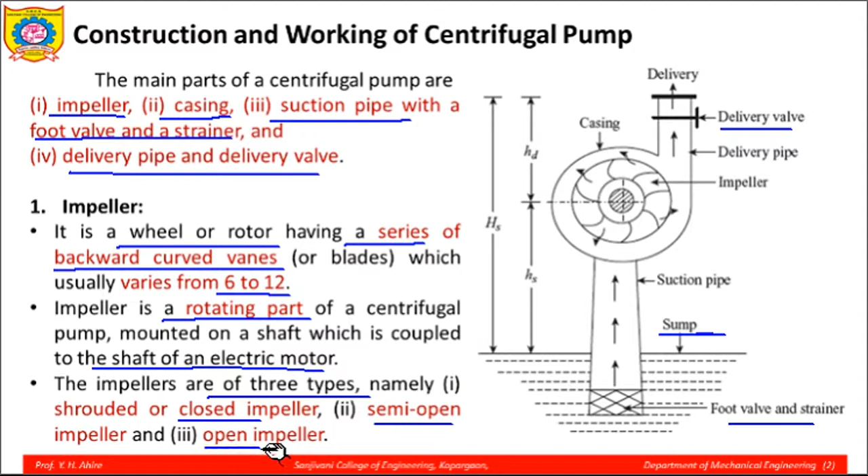Okay, the back plate is called as base plate, and the front plate, this one, is called as a crown plate. So these metal plates, also known as shrouds, are known as crown plate and base plate. Okay, the closed impeller is more efficient and it provides better guidance to the liquid.

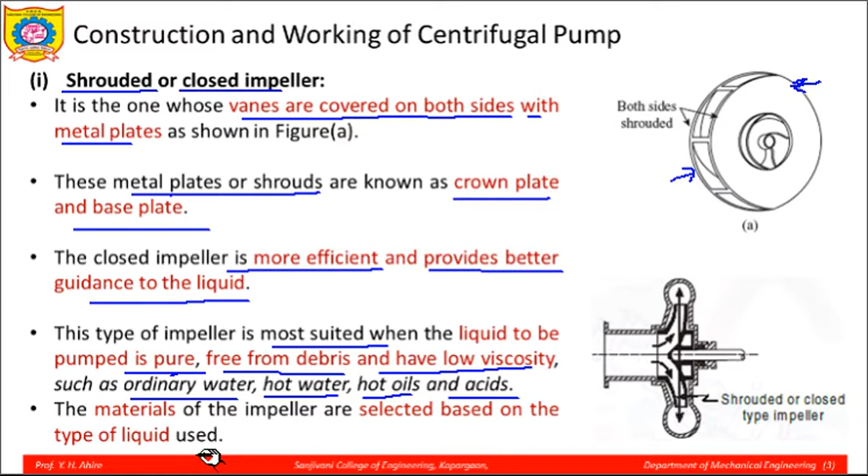This type of impeller is most suited when the liquid to be pumped is pure and it is free from debris and has low viscosity. Okay, examples of such liquids are ordinary water, hot oils, and the acids, right? So these liquids should be pure and they should be free from the solid debris. Also the liquids should have low viscosity. Okay, the material of the impeller is selected based on the type of liquid used.

It can be used even if the liquid contains some debris such as sewage water, paper pulp and sugar molasses. Okay, these kinds of liquids containing some semi-solid debris can be pumped by means of a semi-open impeller.

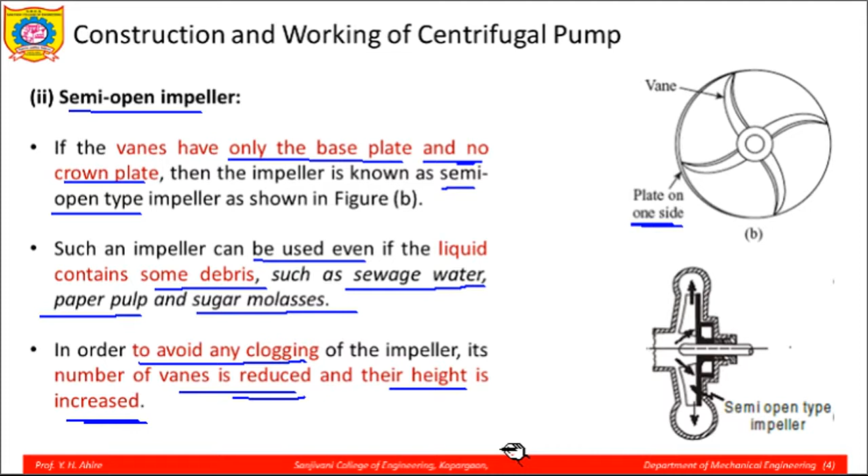Now, in order to avoid any clogging of this impeller, its number of vanes is reduced and their height is increased so as to prevent the clogging of the impeller because of debris. The number of vanes is less, but the height of the vanes is more.

The third type of impeller is open impeller. An open impeller is the one whose vanes have neither the crown plate nor the base plate. Okay, these vanes are open on both sides, right?

Examples are paper pulp, sewage water and the water containing sand, grit, pebbles and clay. Such kinds of liquids can be pumped by means of an open impeller. Generally, this impeller is made of forged steel as a material, as it has to perform a very rough duty.

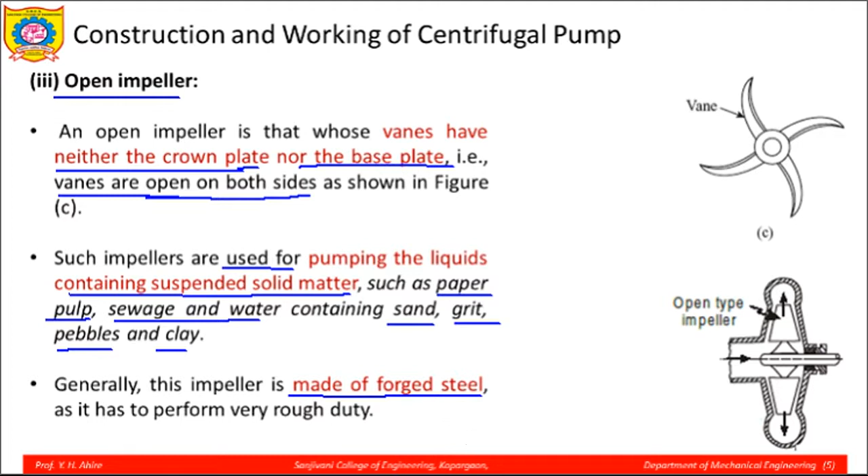Now, the second component of a centrifugal pump is a casing. Casing is an airtight chamber which surrounds the impeller. It is similar to the casing of a reaction turbine. An airtight chamber which surrounds the impeller of a centrifugal pump, and it is almost similar to the casing used in a reaction water turbine like a Francis turbine

or Kaplan turbine. The casing is designed in such a way that the kinetic energy of the water discharged at the outlet of the impeller is converted into pressure energy before the water leaves the casing and enters the delivery pipe. So the kinetic energy of the water leaving the impeller is converted to pressure energy as it flows through the casing before exiting the casing.

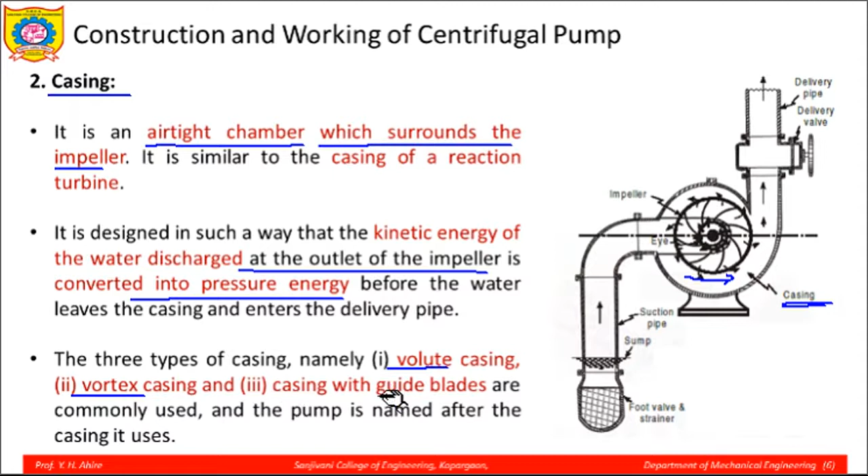Now there are three types of casing: volute casing, vortex casing and a casing with guide blades. So let us see one by one. Volute casing. The volute casing is of spiral shape, in which the area of flow increases gradually from the impeller outlet to the delivery pipe. The volute casing is of a spiral shape.

So here you can see this is a spiral shape of the casing, but the cross section of the casing, that area increases from the impeller outlet up to the entry of the delivery pipe. So there is a continuous increase in cross sectional area of the casing. A gradual increase in the cross sectional area of the casing, and the overall shape is like a spiral.

The increase in area of flow decreases the velocity of the flow with corresponding increase in the pressure of the water flowing through the casing. Cross-sectional area increase results in drop in the velocity and increase in the pressure of the water. Single stage pumps mostly have volute type casing.

The volute casing has higher eddy losses, which results in lower overall efficiency of the pump. There will be a lot of eddy formation as the liquid flows in the casing. So that results in a loss of energy, so the efficiency reduces. The pumps which use such a type of casing are called volute pumps.

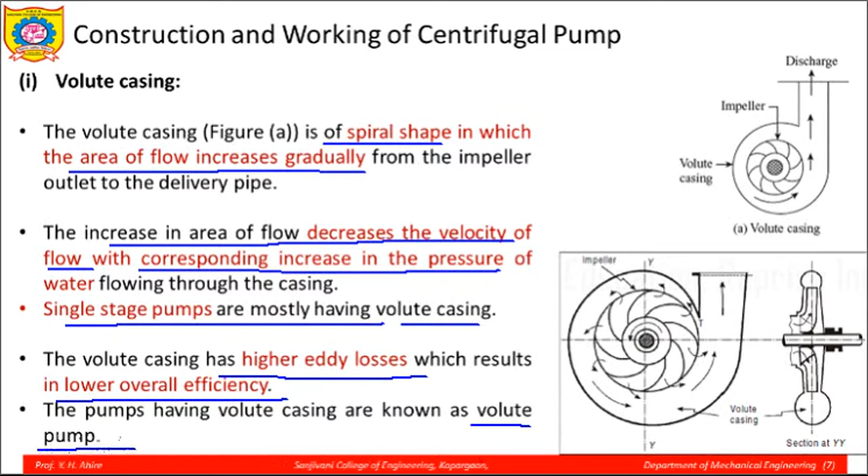The vortex chamber reduces the eddy formation to a considerable extent. Thus, the efficiency of these pumps will be more than that of the earlier volute casing pumps, as it reduces the formation of eddies. The pumps which use this type are called volute pumps with a vortex chamber.

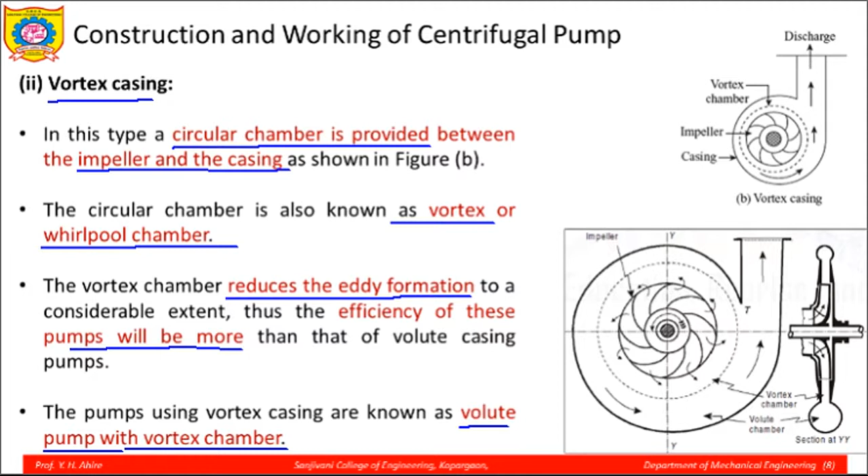Then we have the third type, casing with guide blades. The impeller here is surrounded by a series of fixed guide blades which are mounted on a diffuser ring. The impeller is surrounded by a series of fixed guide blades, and these guide blades are mounted on the diffuser ring. And then there is the external casing.

The guide vane passages are of increasing area, so that reduces the velocity and increases the pressure of the flow, and the water from the impeller enters the guide blades without any shock. That is how the guide blades are designed. The water from the guide vanes then passes through the casing, which is mostly concentric in shape with the impeller.

The pumps having guide vanes are called diffuser pumps, or these are also known as turbine pumps, as it resembles a reversed reaction water turbine. Construction wise it is similar to that. These pumps may be of vertical or horizontal shaft type. The vertical shaft type occupies less space and is suitable in deep well installations.

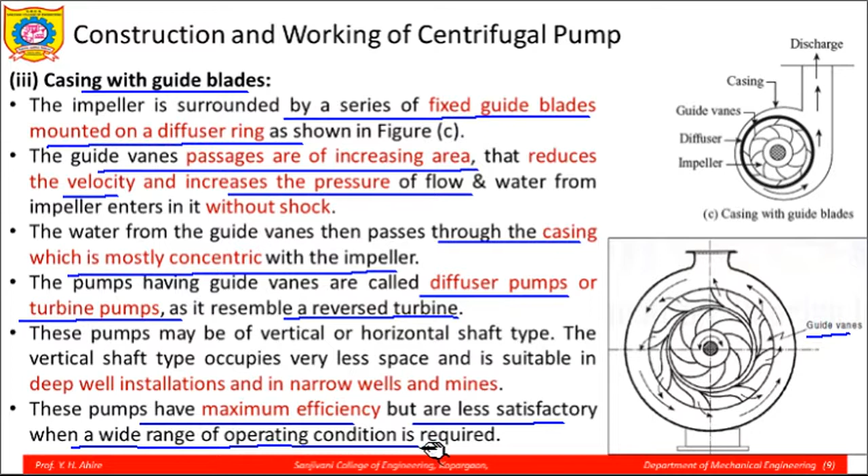These pumps have maximum efficiency, but these are less satisfactory when a wide range of operating conditions is required. So they are efficient at one particular operating condition.

Then we have the third component, that is the suction pipe with a foot valve and a strainer. Now, the suction pipe is a pipe whose upper end is connected to the inlet of the pump, that is the center of the impeller, which is also known as the eye of the impeller, and the lower end of the suction pipe dips into the liquid in a sump.

The lower end of the suction pipe is fitted with a foot valve and a strainer. The foot valve is a non-return one-way valve which opens in the upward direction, and it prevents the flow in a downward direction. Okay, one-way valve in upward direction. The liquid first enters the strainer, which removes the debris, if at all, from the liquid, and then the liquid flows into the foot valve, and then it will flow through the suction pipe up to the entrance of the impeller.

The delivery pipe and the delivery valve is the last component. It is the pipe whose lower end is connected to the outlet of the pump, and its upper end delivers liquid to the required height to the overhead tank. Now, just near the outlet of the pump on the delivery pipe, a regulating valve is fitted, which controls the flow of liquid from the pump into the delivery pipe.

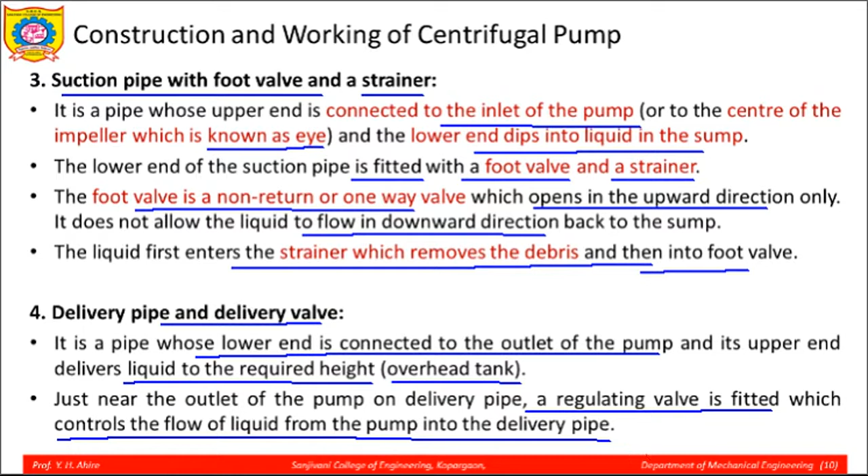The stepwise working of a centrifugal pump is explained below. The first step in the working operation of a centrifugal pump is priming. Now, during the priming operation, the delivery valve is kept closed. Priming is the operation in which the suction pipe, the casing of the pump, and some portion of the delivery pipe up to the delivery valve are completely filled with the liquid which is to be pumped, so that no air pockets are left. Okay. So, this portion of the suction pipe, casing, and some portion of the delivery pipe is filled up with the liquid so as to remove any air pockets before starting the pump.

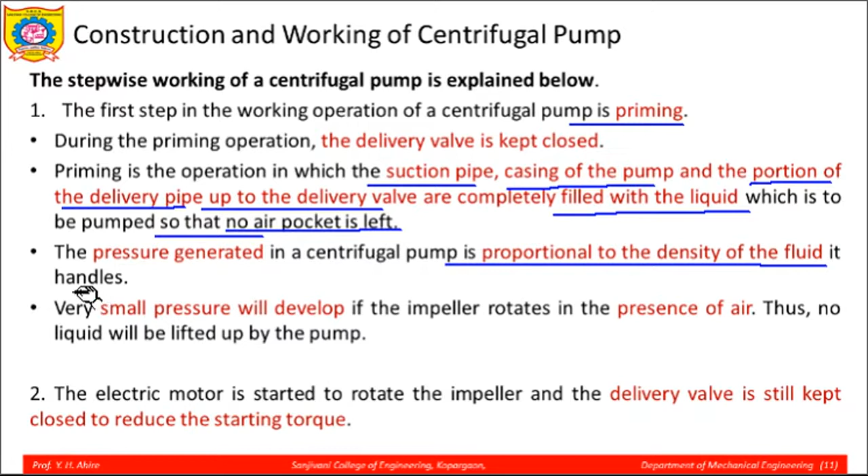The pressure generated in a centrifugal pump is proportional to the density of the fluid it handles. Okay. So, a very small pressure will be developed if the impeller rotates in the presence of air. This point actually refers to the negative pressure that develops at the center of the impeller. And this negative pressure, the vacuum pressure that develops at the center of the impeller, is proportional to the density of the fluid that it handles. Thus, a very small pressure will be developed if the impeller rotates in the presence of air. Thus, no liquid will be lifted by the pump if air is present.

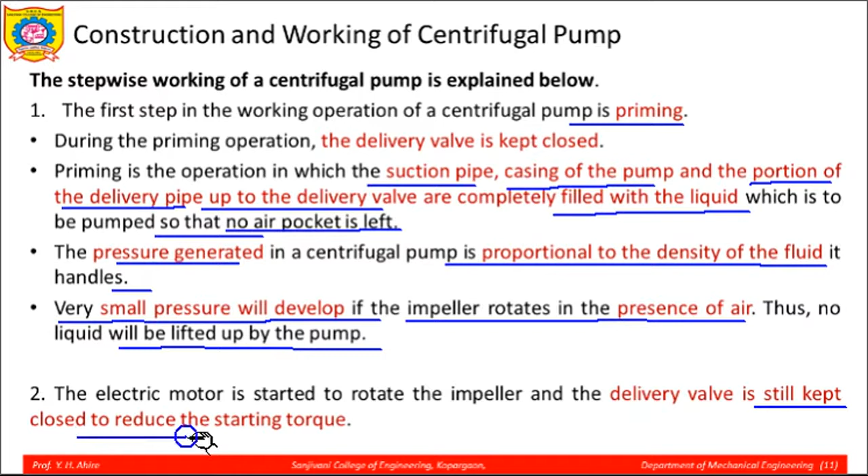The electric motor is started to rotate the impeller, and the delivery valve is still kept closed so as to reduce the starting torque. The rotation of the impeller in the casing full of liquid produces a forced vortex which provides a centrifugal head to the liquid and results in an increase in pressure throughout the liquid. So, the rise in pressure head at any point of the rotating liquid is proportional to the square of the angular velocity and the distance of the point from the axis of rotation. Okay. Thus, if the speed of the impeller of the pump is high enough, then the pressure of the liquid increases considerably.

Now, when the delivery valve is opened, the liquid flows in an outward radial direction and leaves the vanes of the impeller at the outer radius with a very high velocity and high pressure. The rotation of the impeller and centrifugal action causes a partial vacuum at the eye of the impeller, which causes the suction of the liquid from the sump through the suction pipe. The sucked liquid replaces the liquid which is being discharged from the circumference of the impeller. Further, some velocity head is also converted into pressure head in the casing that we have discussed, and also in the diffuser blades if diffuser blades are used.